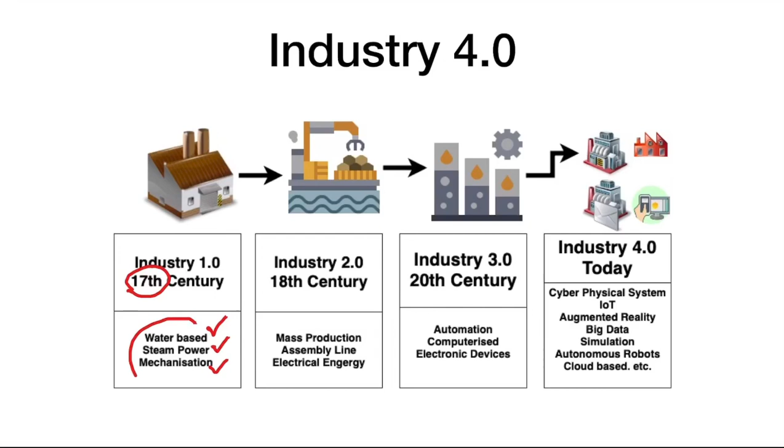So what leads to Industry 4.0? In Industry 1.0, in the 17th century, it was mainly based on water based industries, steam power and mechanization. Everything became mechanical, where before human beings and horses were being used for these equipments, but after that it was mechanized completely. That's what we call Industry 1.0.

Industry 2.0 came about 100 years after Industry 1.0, mainly dealing with mass production, assembly line and electrical energy. These were introduced and continued for almost 2 centuries. Industry 3.0, what we were experiencing 10 years back, is automation, computerization, and most electronic devices and components, used in the 20th century.

But today's sector involves cyber physical systems, everything with the help of automatic control systems, then IoT, augmented reality. Any application we design, before going into reality, we test how it looks on a real platform, using augmented reality or virtual reality, AR and VR. Then we analyze huge amounts of data, big data, then simulation. Most applications before deployment will be simulated, and autonomous robots play a major role in many industries, with most applications being cloud based. This is how Industry 4.0 has transitioned from Industry 1.0 over the past 4 centuries.

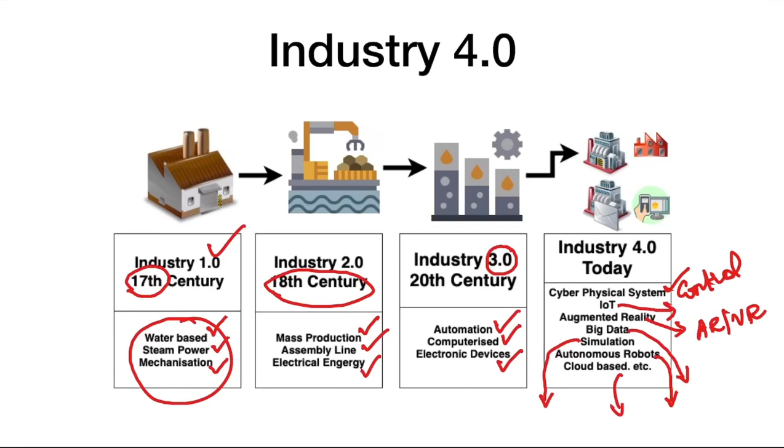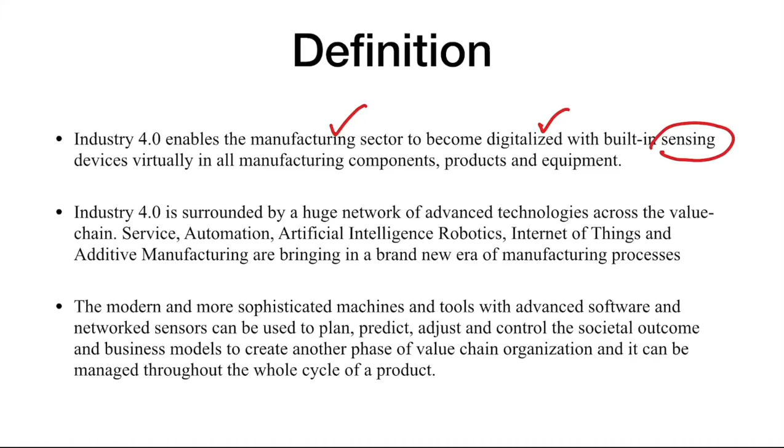We will see what different components are involved. The definition, as per various remarks by scientists across the globe, says Industry 4.0 enables the manufacturing sector to become digitalized with built-in sensing devices virtually in all manufacturing components, products and equipments. Irrespective of products or equipments anywhere, it uses sensing components, and that's where Industry 4.0 takes a major role.

That's why IoT and sensors came into existence. Another definition says Industry 4.0 is surrounded by a huge network of advanced technologies across the value chain: service, automation, AI, robotics, IoT and additive manufacturing, bringing in a brand new era of manufacturing. A new word, additive manufacturing, refers to 3D printers and other such technologies brought into Industry 4.0 along with existing technologies like AI, robotics and IoT.

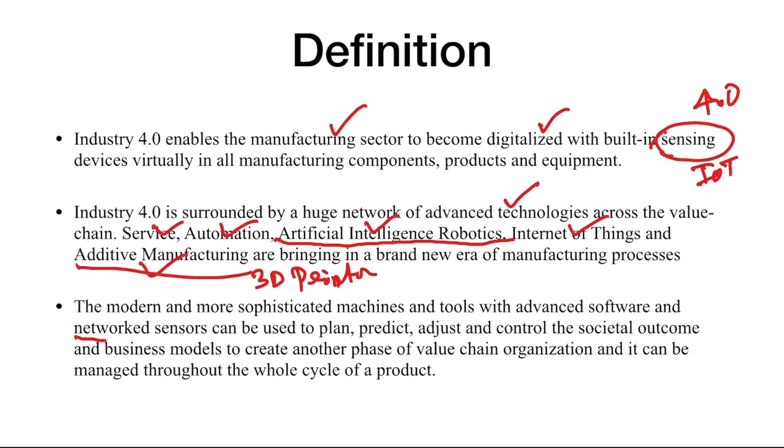Finally, modern and sophisticated machines and tools with advanced software and networked sensors, meaning sensors that are in a network, can perform preventive actions: actuate, sense, plan, predict, adjust and control the societal outcome and business models to create another phase of value chain organization, managed through the whole cycle of the product, from planning to product strategy execution using Industry 4.0.

To begin with, there are so many automotive sectors and car manufacturers, even in Chennai or in India, like Hyundai and Maruti. Most of this manufacturing has been adopting Industry 4.0 standards, meaning that the production of cars, starting from designing the car to the final product, encounters so many Industry 4.0 standards, and finally the product is the outcome. That's how the growth of Industry 4.0 has been taken into play.

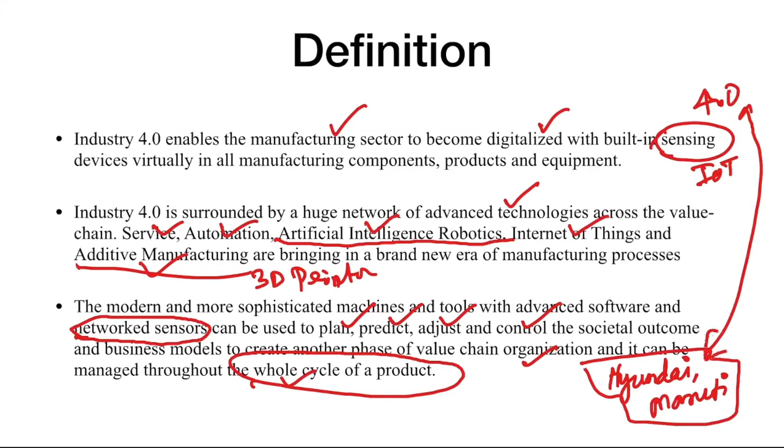Now the components of Industry 4.0. What are the different components involved before we go for industrial IoT? First is horizontal integration, vertical integration, and engineering integration, or what we call end-to-end integration.

In the horizontal integration, we can see material control, financial control, and knowledge control. Horizontal means that before we design a particular product, we plan where the material has to be procured, what financial commitments are involved, and what knowledge is needed, meaning who is going to develop what. That's how this first initial level of planning happens. That is horizontal integration.

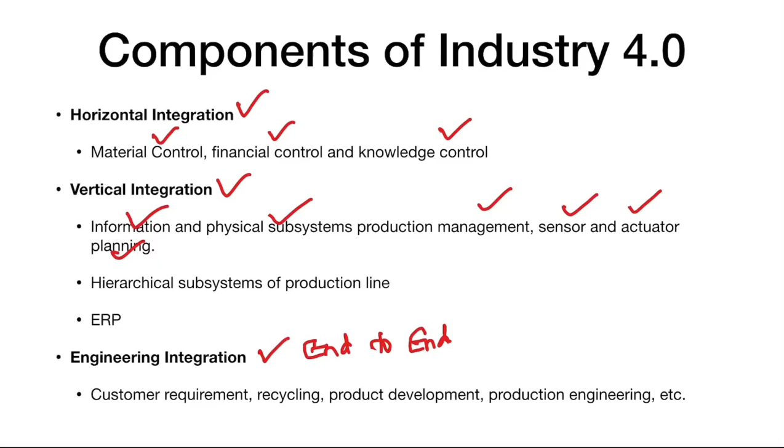In the verticals, what we see is physical subsystems, informational subsystems, production management, sensor and actuator planning. All these things happen at the vertical integration. Apart from that, hierarchical subsystems of the production line - in the production line, what different products or subsystems are involved, and how to design those subsystems - all these things are planned in the verticals.

Then we have enterprise resource planning, ERP, which covers how the resource will be managed across the entire product cycle. Then finally we have end-to-end integration, or what we call engineering integration.

In engineering integration we see customer requirement, recycling, product development, production engineering, etc. This means understanding what the customer really wants - take a car, for example, how the customer experiences using it, how you take a customer survey, and what recycled products are used for producing the door of the car, the window shields, or even the engine components, since the engine itself may run on recycled material. Then how the product is being developed, and what the production engineering components are. Everything matters a lot before it comes to designing a particular product. That's how Industry 4.0 evolves.

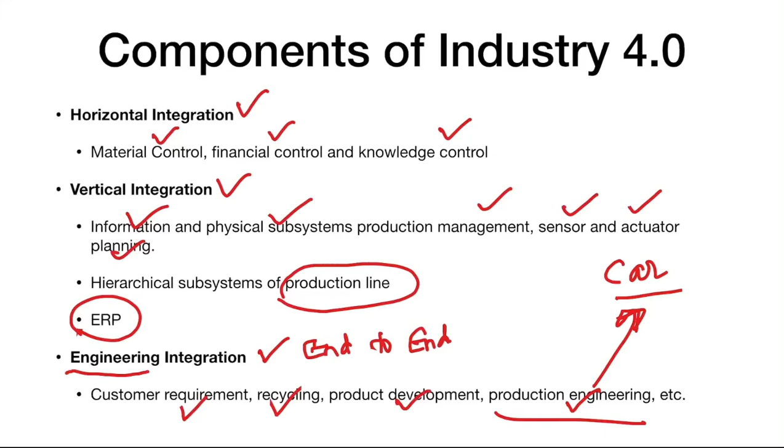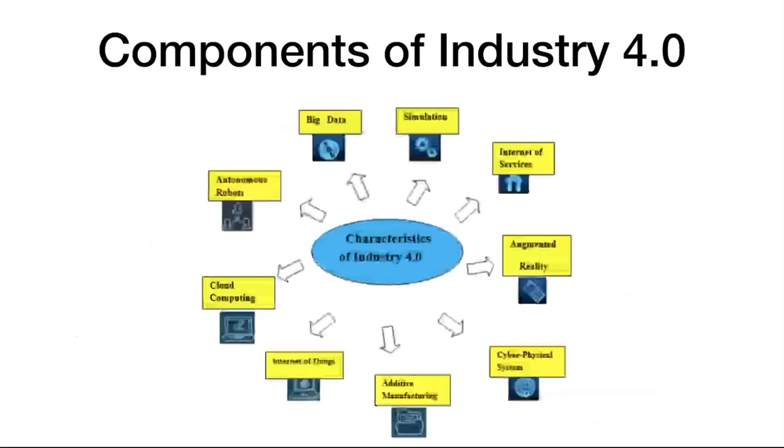So what are the different components of Industry 4.0? This topic might be redundant, but the different topics for industrial IoT include IoT, Internet of Services, augmented reality, cyber physical systems, additive manufacturing, cloud computing, autonomous robots, big data, and simulation. All these components are part of Industry 4.0.

Either way, most companies adopting Industry 4.0 standards will encounter all these applications. Even a company producing nuts and bolts will encounter all these applications. In a particular industrial setup in the 21st century, we cannot deny a computer engineer being present in a purely mechanical company, because of cloud computing, IoT, augmented reality, and big data - everywhere we involve computer science.

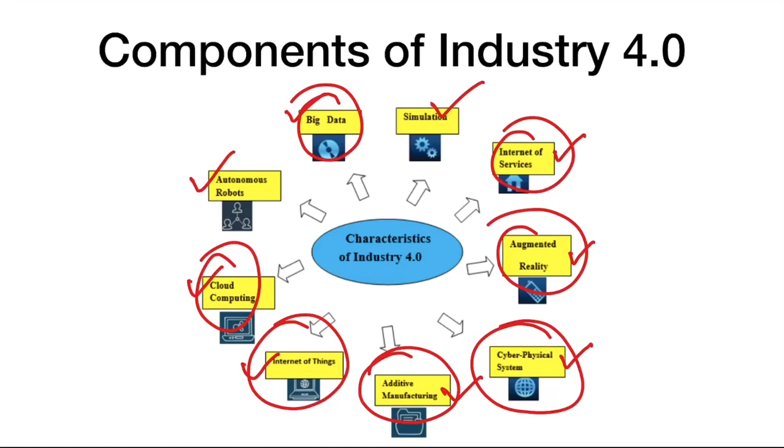And if you see IoT, the services, additive manufacturing, and cyber physical systems, electronics and electricals are also involved. So all parts of engineering will be assisting or available in an industrial IoT setup. These components describe what is mandatory for Industry 4.0.

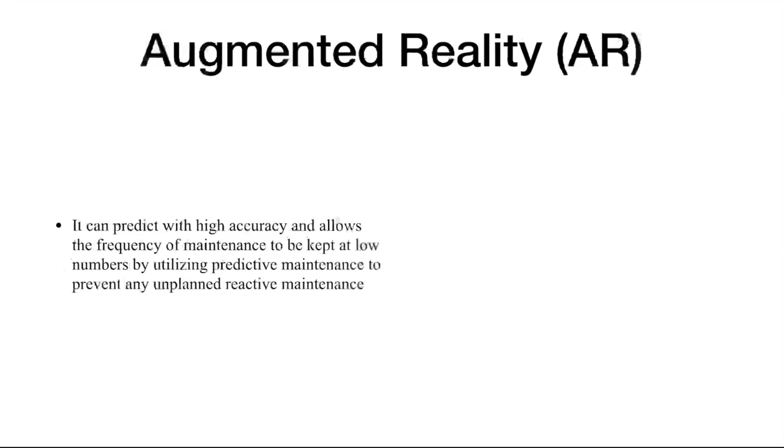Next thing is augmented reality. It can predict with high accuracy and allows the frequency of maintenance to be kept at low numbers, by utilizing predictive maintenance to prevent any unplanned reactive maintenance.

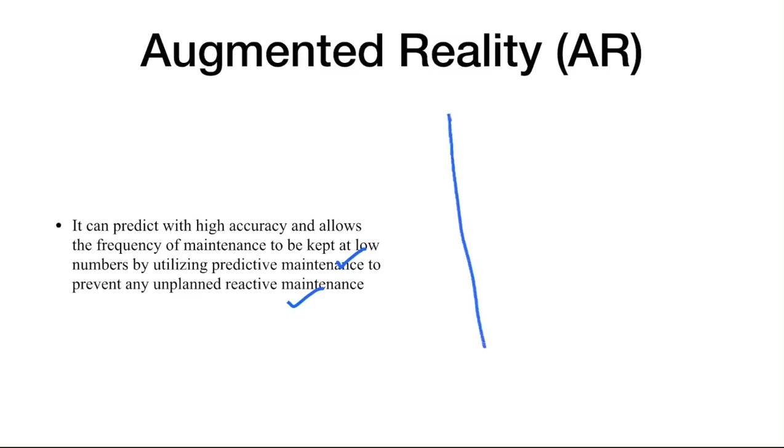Augmented reality means, before we actually design a motor, let's say we take an empty space. Let's say I want to design a motor with two armatures or anything. Before the machine is produced and manufactured, I want to check how it works. So I design this motor and fix it on the empty space, so that using any goggles, special glasses, or even in a browser, we can see how the machine operates.

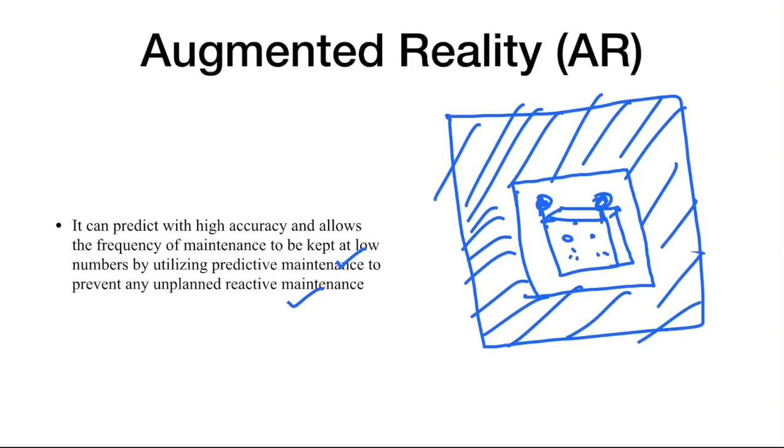So without actually designing the machine, by using simply software I can control the machine. I can press this button, I can press this, and I can check the operation of the machine. So based on everything working fine, I can then take it into a real model. So that's how AR plays a major role.

Another example is augmented reality and road conditions. Let's say I want to drive a car. The car is driven in various road conditions - one will be a tar road, one with so many ups and downs, and a road with cement. So in all these driving conditions, let me drive a car and see how the car behaves.

I cannot really test a car before it has been developed. So before I develop a car, what I do is drive a car with the help of this augmented reality. Then I will get the performance of how this car will really drive itself. Accordingly I change the engine parameters, the air fuel mixture, the spark plug, everything, and then I drive the car. So it's kind of a simulator - before I go for designing the complete product, let me go and simulate and find out what's happening. That's how augmented reality plays a major role.

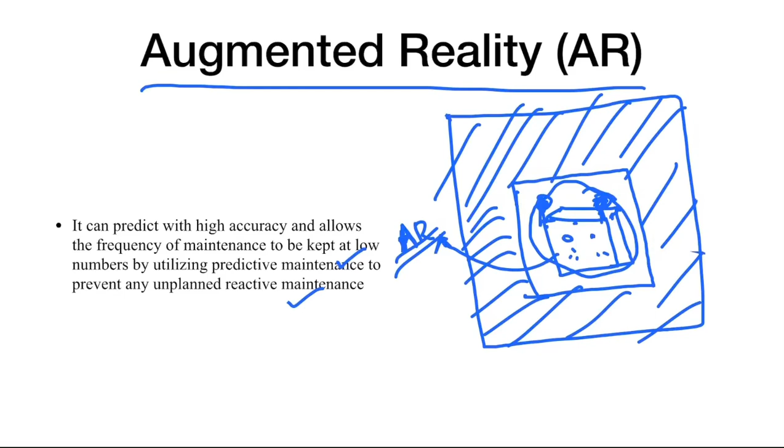Next thing is autonomous robots. You might have seen in some movies how autonomous robots are helping, and even in some hotels in India, instead of a server coming to serve you, robots will be bringing the plates and the prepared dishes to the table. That kind of autonomous robot is part of Industry 4.0.

In most industries, for fixing even a screw, nut or bolt to a particular engine or anything, everything is taken care of by the robots - what kind of pressure to give, what is the optimal pressure, everything will be handled.

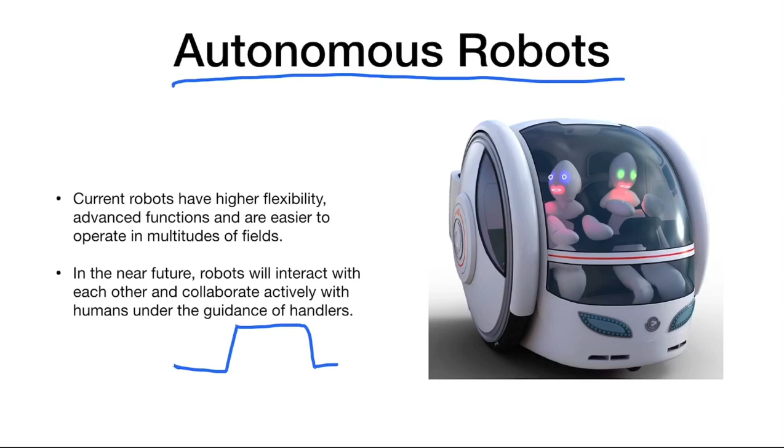Manual intervention has its limits - one good example is a car. Say I want to fix a tire, and there are 4 tires to fix. If I fix them manually, all 4 tires cannot be firmly fit with the same value, but using autonomous robots, all 4 tires will be fixed exactly with the same pressure and everything. So autonomous robots also play a major role there.

In most industries in the country, they are employing robots for designing so many things. One good example is once the door is designed for the car, the door will be automatically placed using only robots. This makes the job easier and more timely - if a human being fitting all 4 doors for a car takes 3 hours, a robot can simply take just 1 hour. That means 2 hours is automatically optimized. That's how autonomous robots are in great demand in Industry 4.0.

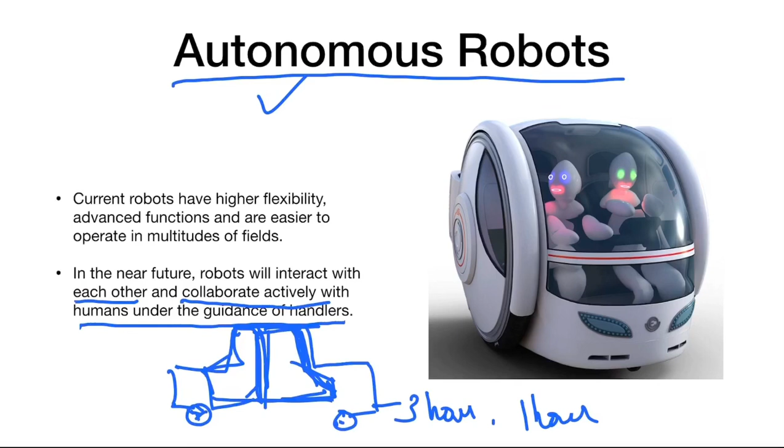In future, robots will interact with each other and collaborate actively with humans under the guidance of handlers. That means the robots can talk to other robots, and they can also talk to the handlers - the ones who take care of them.

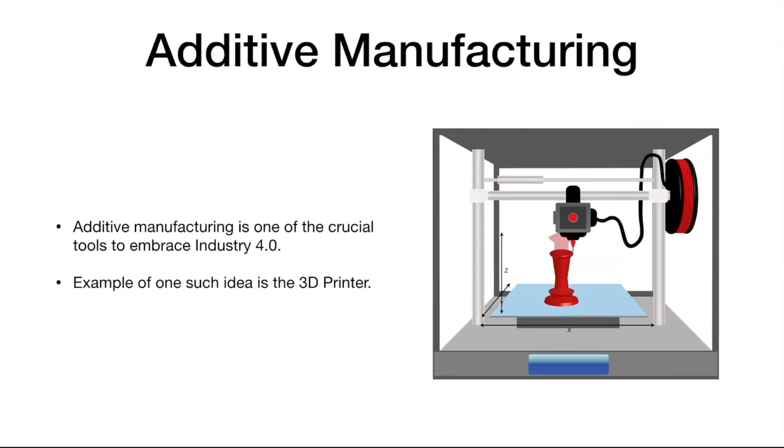Additive manufacturing, which is 3D printing, is one of the greatest inventions of the era. For any kind of equipment, we just need a 3D printer to print it. The printing time may be very huge, but the printing errors will be very minimal. Once you design the product, you give it to the printer and it will print as per specification. Even the raw materials can be fed into it - if you want a plastic thing, a fiber equipment, or anything, we can give it. That's one of the best examples of additive manufacturing - the 3D printer.

So cloud computing - as everyone knows, cloud computing is a pay-as-you-go model. We call it pay as you go.

That means you need not invest upfront a huge amount of money to store the data, the processing power, or to have memory, everything. So get a cloud space of minimal price.

Pay as you go means once you are enlarging your industry, according to the data requirement, you can pay as you go. That means you pay for the number of users employed in your organization. If there are only 10 users, you pay for 10 users. If you cross 10,000 users, accordingly your profit also will be very huge, your margin is also very huge. In that case, pay for that many users. That's the way cloud systems work.

A small amount of money allows enterprises or individuals to access these resources in the cloud servers. So most of the resources, you need not have a complete data center. 10 years back, most manufacturing industries had a separate computer server setup placed in their organization, and they would deploy 2 or 3 people to monitor the entire data center. But now there is no need of a data center, because the entire data center could be in the cloud.

So we can pay only for the operational expenditure, no need of capital expenditure. So the advantage of cloud is only OpEx is needed, CapEx is not at all needed. That is the main advantage of cloud computing.

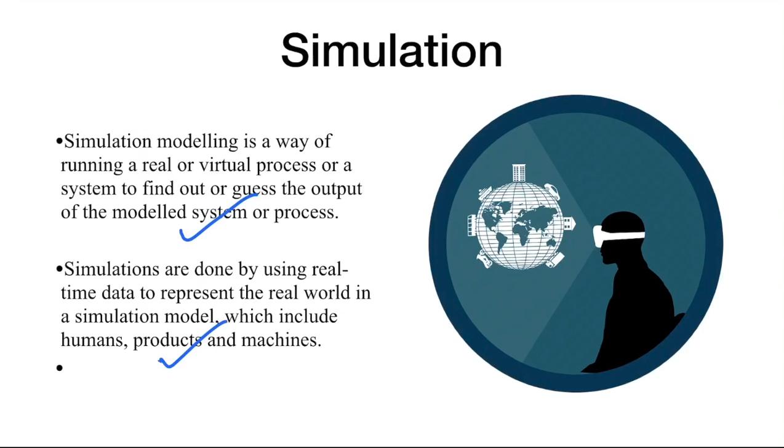So these are the different components for industry 4.0. What are the different questions for the learners? Just have these questions in your mind. Machines are speaking to you, are you listening? The machines you are using, they are speaking to you, are you listening? So just think of any machine or any process that is talking to you.

For example, if you are purchasing a car in 2020 or 2021, the car will be talking to you, not orally. The car will inform you as and when something is happening to the car through the dashboard, or the car will give an alert. These kinds of things, your machines will be talking to you, trying to talk to you. We just have to listen to the car, listen to the machines.

Can you think of any smart industrial business proposal that uses all the above components of industry 4.0? Think of any industry that uses all these components I was showing: simulation, autonomous robots, augmented reality, IoT, Internet of Services, cyber physical systems. Can you think of any business proposal you would like to give that uses all the components that lead to industry 4.0?

Having said these things, we are in module number, week number 2. Module number 2 or 3 is completely on machine to machine IoT. Now we'll see more details on how to design an IoT application using a required operating system and a simulator. That's what we are going to see.